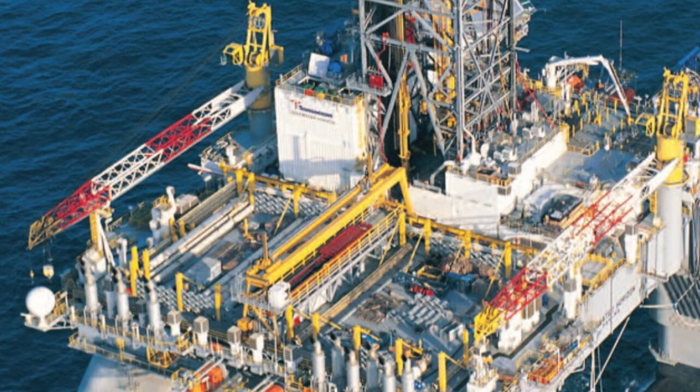126 workers on the BP Deepwater Horizon were going about the routines of completing an exploratory oil well, unaware of impending disaster. The loss of control of the Macondo well, the resulting explosion and fire resulted in loss of life, a spill of nearly 5 million barrels of oil, and approximately $60 billion in damages and lost value.

With this presentation, Lone Star will demonstrate the capability to use both synthetic and real-time data to operate high-value, advanced analytics at the network edge on gateways that will focus on the predictive cumulative risk impact of decisions leading up to the day of the incident.

The gateway will be running on a bowtie risk model generated in AOS Architect and loaded into an HP EL20 gateway running AOS RT, based on decisions and data from the President's report regarding the incident.

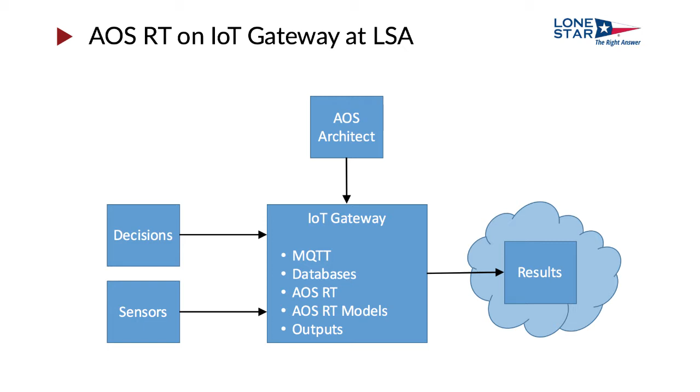Geologic conditions, casing selection, cement design and test result decisions will be displayed on the left side of the screen. The processes to be monitored during the cement job, and to verify the cement job prior to temporary abandonment, are shoe track conversion, positive and negative pressure test.

The results of 1,000 Monte Carlo simulations from the IoT Gateway will be displayed on the right side of the screen in real time.

As decisions and processes deviate from design expectations, the predicted results of these decisions will increase the probability of a blowout. The top two indicators, one is the nominal probability of stochastic spread, and the other is the possible high of a stochastic spread. The bottom two risk indicators are process monitors that represent what the crew would be seeing as the processes are being executed.

These are indicators of the sensor readings that deviate from the upper and lower control limits and will turn red as sensor data exceeds these limits. The effect of these deviations will also be seen in the blowout probability risk indicators.

After the rig crew lowered the casing into its final position, a specialized cement blend would be pumped down inside the casing string and then flow out of the bottom and up into the annular space between the casing and the sides of the open hole. Once cured, the cement would seal off the annular space and isolate the hydrocarbon-bearing zone from the inside of the casing itself. The design team on shore had three decisions to be made prior to the cementing process.

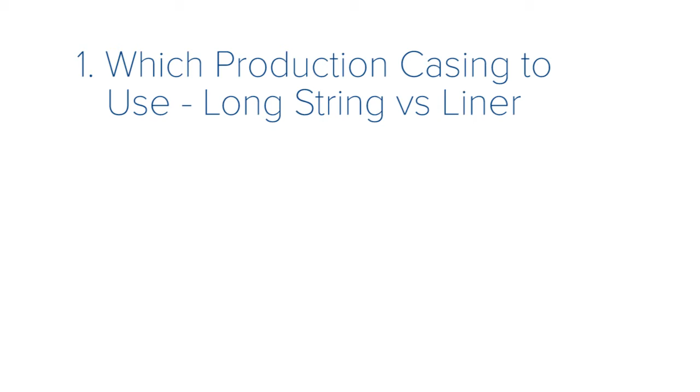One, which production casing to use, long string versus liner. Two, the number of centralizers for the casing. And three, the cement slurry design and test results.

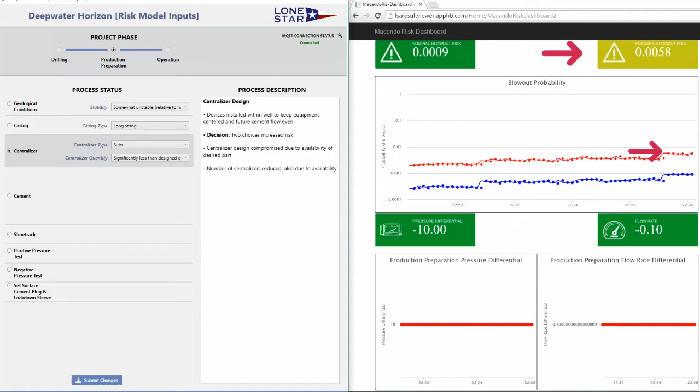BP's design team originally had planned to use a long string production casing, a single continuous wall of steel between the wellhead on the seafloor and the oil and gas zone at the bottom of the well. However, after a lost circulation event, they were forced to reconsider a shorter string of casing anchored to the next higher string. A liner would result in a more complex and theoretically more leak-prone system, thus increasing the risk of a blowout.

A cement slurry must be tested before it's used. When testing a slurry that will be foamed with nitrogen, the lab also evaluates the stability of the resulting cement. A stable foam slurry will retain its bubbles and overall density long enough to allow the cement to cure. If the foam does not remain stable up until the time the cement cures, nitrogen can break out of the cement, with unpredictable consequences.

Based on these critical decisions, the risk context has changed from a 0.0004 probability of a blowout to 5% nominal probability and possible high of 13%. The crew was not aware of this change in the risk context based on these decisions, and their reaction to the risk context was inadequate.

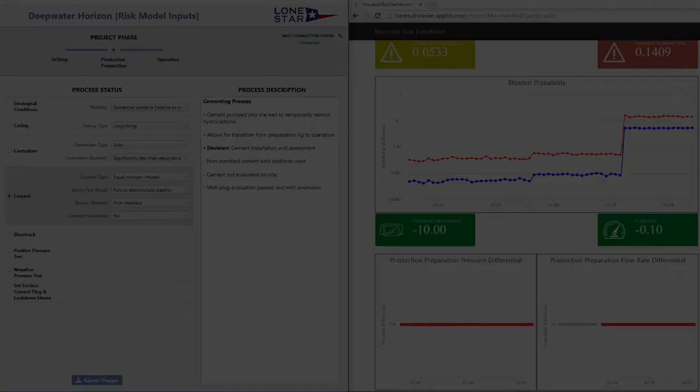The design expectation was that 600 psi would establish cement flow into the well. Even when pumping fluid at 1800 psi into the well, the crew was unable to establish cement flow. At that point, the rig team decided to increase the pump pressure in discrete increments, hoping eventually to dislodge the autofill tube. On their 9th attempt, mud finally began to flow. Significantly, however, the pump rate of mud into the well and through the shoe track thereafter never exceeded approximately 4 barrels per minute. The team concluded that the float valves had converted.

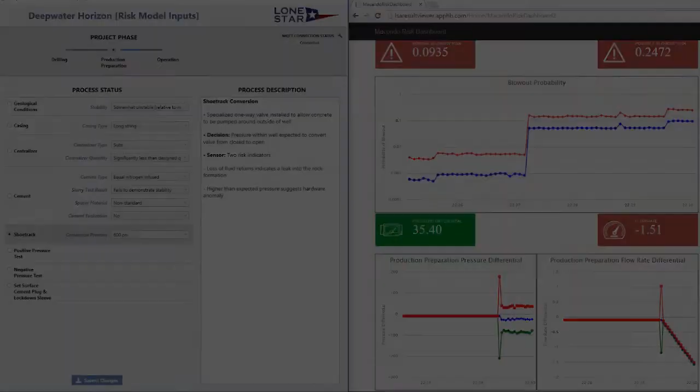The first step in the temporary abandonment was to test well integrity, to make sure there were no leaks. The positive pressure test evaluates, among other things, the ability of the casing in the well to hold in pressure. Much like pumping air into a bike tire to check for leaks, the rig crew pumped fluids into the well to generate pressure and then checked to see if it would hold. They pressured the well up to 250 psi for 5 minutes, and then pressured up to 2500 psi and watched for 30 minutes. The pressure inside the well remained steady during both tests, showing there were no leaks in the production casing through which fluids could pass from inside the well to the outside.

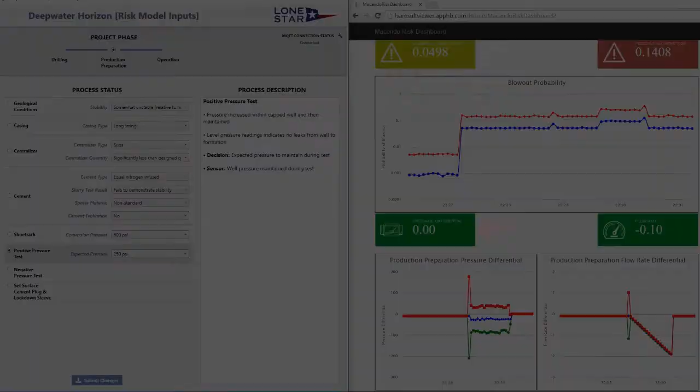The negative pressure test checks not only the integrity of the casing, but also the integrity of the bottom hole cement job. At the Macondo well, the negative pressure test was the only test performed that would have checked the integrity of the bottom hole cement job. Now, the crew would reduce pressure inside the wellbore to 0 and see if it remained at 0. Sensor readings inside the wellbore increased, so a second test was performed using the kill line. The rise in pressure in the wellbore was attributed to bladder effect.

First, the crew sets up the well to simulate the expected hydrostatic pressure. Second, the crew bleeds off any pent-up pressure that remains in the well. Third, the crew and the well site leaders watch to make sure that nothing flows up from and out of the well and that no pressure builds back up inside of the well. The crew made a key error and mistakenly concluded the second negative pressure procedure had confirmed the well's integrity and moved on to the next step in the temporary abandonment.

A dramatic and tragic event that illustrates the power of predictive and prescriptive analytics performed at the network edge on gateways that assess cumulative risk, and the significant decisions facing companies and stakeholders across all industry categories.